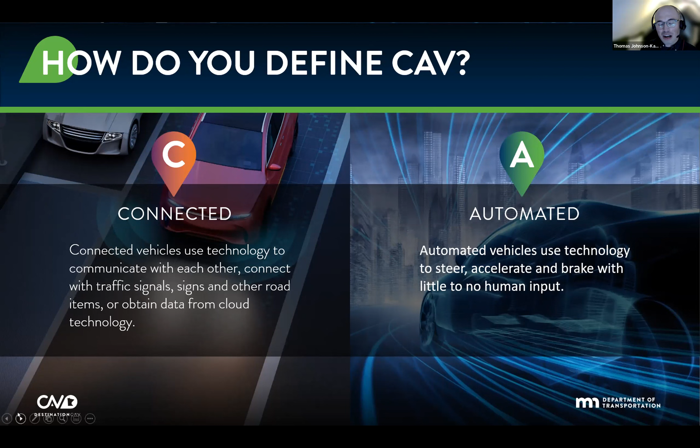So today I'm just going to highlight a few of our projects we have going on at MnDOT, just at a really high level. I'm happy to take questions, or if people want more information on these projects, feel free to reach out to me or anyone in our Connected Automated Vehicle Office at any time. We're always happy to chat and share what we're up to.

The first project I'll share about is one of our shuttle demonstration projects we have going on. This is called Bear Tracks. It's taking place in White Bear Lake, so just a suburb outside of the Twin Cities here. This is a 12-month pilot project testing technology in White Bear Lake. It started in the summer of 2022, so it'll wrap up this coming summer. It was funded through our CAV Challenge program, which is a competitive grant program that is kind of a rolling RFP for anyone to apply for funding to test out this technology.

This is actually one of 3 pilot projects we have or had in the state. Our first one was in downtown Rochester, the Med City Mover, that wrapped up last summer in 2022. Then we have this Bear Tracks project, which is taking place in a suburban environment. And then I'll also highlight our Go Marty project, which is taking place in a rural environment in Grand Rapids, Minnesota.

So a little bit about the shuttle in this project. The technology we're using is a highly automated shuttle provided by a company called Navya. It can hold up to 11 passengers, and it's a 100% electric vehicle.

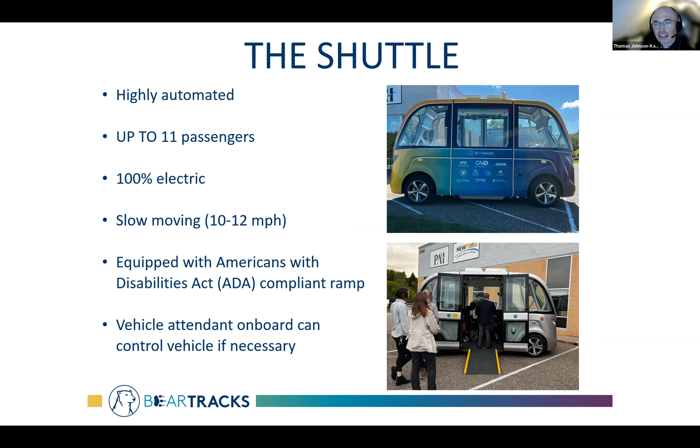This is a slow-moving shuttle, so it travels about 10 to 12 miles an hour. It is on the road with other vehicles. You'll see the route shortly. It's equipped with an ADA compliant ramp, and this shuttle, and all of our shuttle projects, have a vehicle attendant on board at all times to take over as necessary and assist passengers.

I'll just quickly go through these projects. Next I'll get into our Go Marty project. As I mentioned before, this is another autonomous shuttle project we have. This is taking place in Grand Rapids, Minnesota.

This one is an 18-month project. We launched in early October of 2022, so it'll run through March of 2024. Unlike the White Bear Lake project, which just has 1 shuttle, Go Marty has 5 vehicles that operate in about a 16.5 square mile area.

This is quite a different project where these shuttles are on demand and point to point. The shuttles can be requested through either a May Mobility app on a smartphone, or by calling into the local call center, First Call 211. There are about 70 pickup and drop off points within that 16.5 square mile area. When folks request a ride, it will tell you where the closest pickup or drop off point is, say where you want to go, and it'll drop you off at that closest point.

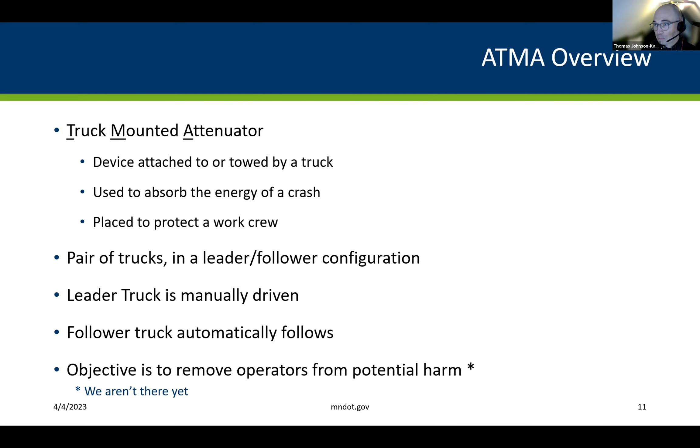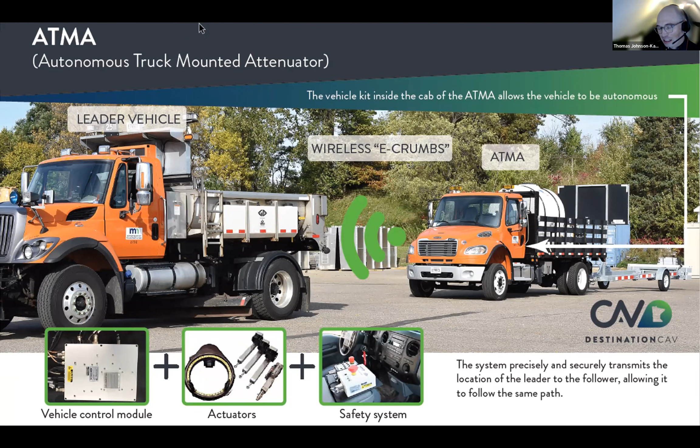So what we've done so far, this has been a multi-year effort. We've had these trucks, which are provided by Kratos, outfitted for the ATMA system. We've done some testing on a closed track at Elko Speedway. We had some folks from the Metro Lakeville shop at MnDOT perform this ATMA operation, attempting to integrate it into their existing work as some extra work. This was happening last summer.

We learned a lot. Some significant challenges occurred in the metro area - some system failures that required the truck to be out of position to restart. A few other challenges with dashboard warnings and visibility, and just limited hours of testing performed, with the cause being that extra work on top of what the already Lakeville shop staff was doing.

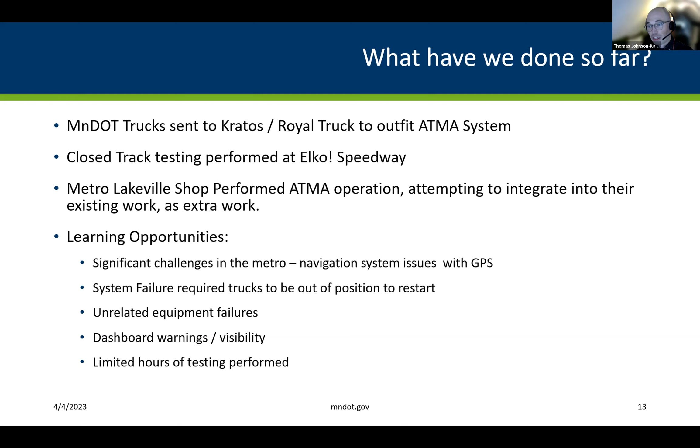So we're taking a little bit of a different approach this coming summer. We made a lot of improvements, software and hardware, to improve the system. And then our CAV-X group is hiring 2 temporary positions to operate the ATMA system throughout the entire summer. They're going to be testing it throughout all the MnDOT districts with district crews this summer, an opportunity to test this in different situations throughout the whole state, and for these crews throughout the district to see the ATMA system in person and interact with it.

The last project I'll highlight quickly is an exciting project we just got going in February called Community Driven CAV. The goal behind this project is that we envision a future where the community is at the forefront of planning and implementing new technology such as CAV. Traditionally, CAV technologies are often developed by companies or universities and then tested in communities - they develop a technology and look for a community or a problem that technology may solve.

So instead, we want to flip the script there, and we want the community to help identify what technology or uses of technology Minnesota plans for that could help address their issues.

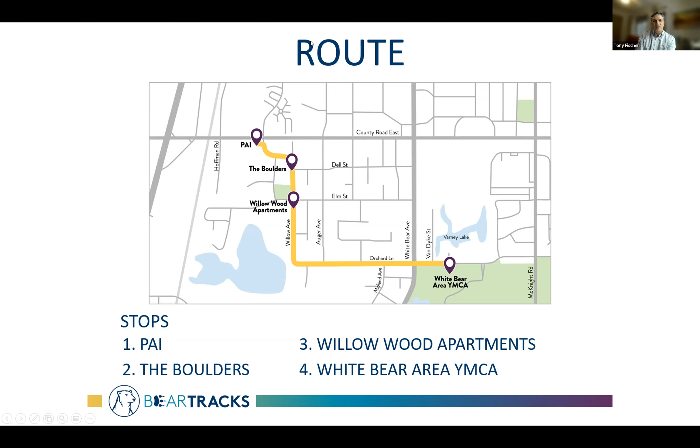Thank you, Tony. Can you see my screen? Looks good, okay.

I'm going to talk about special challenges for autonomous vehicles on winter roads. This is a quick outline of my talk. I'll give you an initial overview of autonomous vehicles in general and the MnCAV vehicle in particular, and tell you a little bit about some of our work on the MnCAV vehicle. Then I'll talk about the challenges for winter operation and some potential solutions to these challenges.

So the two core elements of autonomy are basically adaptive cruise control and steering control. In the case of adaptive cruise control, as you probably know, it's an extension of cruise control where the car has a radar and it's able to measure distances to other cars. The system operates at a desired speed set by the driver, and the throttle and brakes are automatically controlled. But if there is a slower moving car in the same lane, the car switches from speed control to spacing control, and maintains a distance behind the car it is following. Typically this distance is a time gap, for example 1 second or 2 seconds.

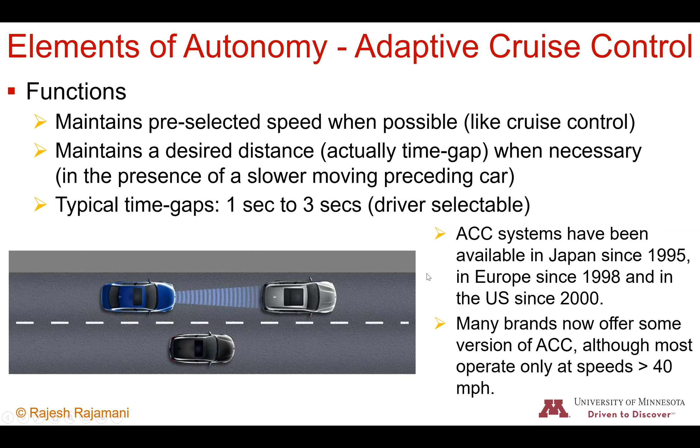Okay, can you still hear me? You cut out for a moment. Are you able to hear me? Yeah, a little bit, I don't know how good the sound quality is, hang on one second. That sounded much better. Sorry about that, that's sounding much better now.

Okay, so the other element of autonomy is basically automatic steering. In the case of automatic steering, cars sold on the road use cameras to measure distances to the lane boundaries, measuring the lateral distance to find your distance from the center of the lane, and this distance is used as feedback control for automatically controlling steering. The types of systems available on cars in the market are warning systems that warn you if your car is going to leave the lane, and automatic lane keeping systems that entirely automate steering control, taking care of steering and enabling staying in the lane, following the lane.

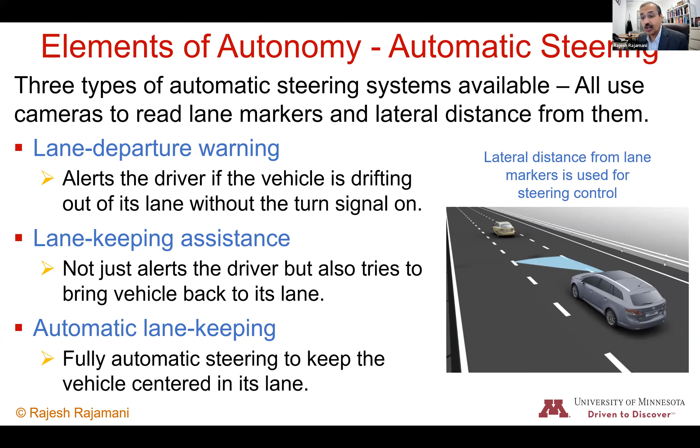So these two elements, adaptive cruise control and automatic steering, are the two basic elements of autonomy, and these are available on level 2 cars sold in the market. In the case of level 2 cars, the driver is responsible for the safety of the car. Oftentimes you need to have your hands on the steering wheel, and you are responsible for finding out if the system is operating safely, and you have to take over if the system is not able to operate by itself.

So what do we have beyond ACC and automatic steering? Here are some systems that are available in the market.

So we have the Cadillac Super Cruise system. This is a system that is available on a few mapped highways. For example, in the Twin Cities, it includes 35E, 35W, and 494.

What the system has, in addition to adaptive cruise control and lane centering, is a few other features. It doesn't require the driver to have hands on the wheel. You still cannot turn back and speak to somebody in the back seat or do things like that. There is a camera that is monitoring you and ensuring that you're looking at the road, but otherwise it doesn't require you to have your hands on the steering.

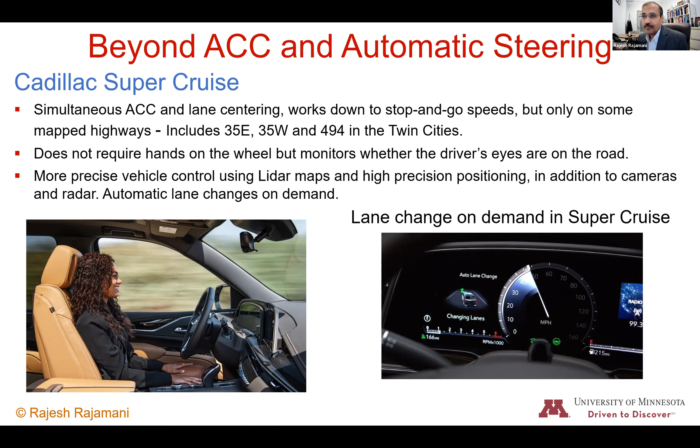So another system that goes beyond level 2 is the Tesla Autopilot. The standard Tesla Autopilot is available on all Teslas, and that is essentially an ACC plus automatic steering system that works in stop and go traffic.

But you can pay an extra $10,000 and get a beta option on a full self-driving system. What this full self-driving system does is it contains more autonomous driving features like automatic lane changes, navigate on autopilot.

It will basically make automatic lane changes. You don't have to request the lane change, it will make those lane changes by itself. It will also take exits when needed, change between highways, for example. It also recognizes traffic lights and stop signs, so it can operate on local roads in addition to highways. So it's got quite a few features beyond the basic autopilot that's available on all the Teslas.

But on this system as well, the driver is required to have hands on the steering wheel and be prepared to take over at any time.

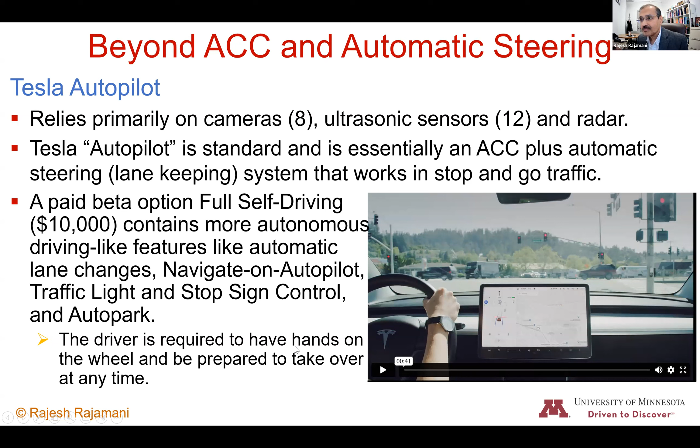So then the MnCAV vehicle that we have at the University of Minnesota. This is a level 2 system. The Center for Transportation Studies owns this vehicle, and so they raised the money for it.

What it is, is a Chrysler Pacifica minivan. This was instrumented by a company called DataSpeed. They implemented the by-wire interfaces on this vehicle and the firmware and software.

Are you still able to hear me? You cut out just for a moment. Is it okay now? Yes, okay.

So the MnCAV vehicle essentially has steering control, and this is a level 2 system for operation on freeways. It has automatic steering control. It uses a Mobileye camera, which is a commercially available system, using lane markings to find the distance from the center of the lane and to do steering control.

It also does lane changes on demand, so you can ask for a lane change. It uses LiDAR segmentation to decide if it is safe to do a lane change, and then does the lane change when it is safe to do so.

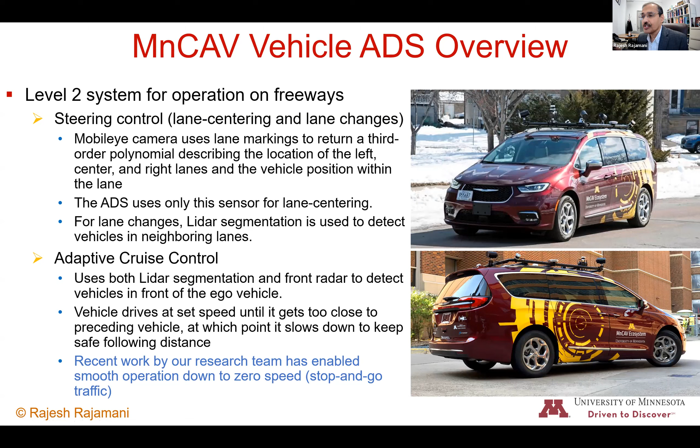So some of the recent research work that we did, I'm going to talk about that on the next slide. We are doing some work on improving the performance of the automation on the MnCAV vehicle.

As far as the adaptive cruise control system, one of the problems with the ACC system that came with the MnCAV vehicle was it did not operate when the speeds drop. Also, it had jerky operation, especially when you use larger time gaps, and when other vehicles cut in, the operation was quite jerky.

So what we did is we implemented smoother ACC operation that included transitional maneuvers. With the transitional maneuvers, we are able to smoothly switch between speed control and spacing control. If the lead car makes a lane change and goes away, or if some other car cuts in, those operations have become really smooth, and you don't notice any hard braking. So those things work out very nicely now.

We also have stop and go operation under heavy traffic, so that works nicely now. Some of the challenges that we had for stop and go operation was that the radar system was designed to discard stationary objects.

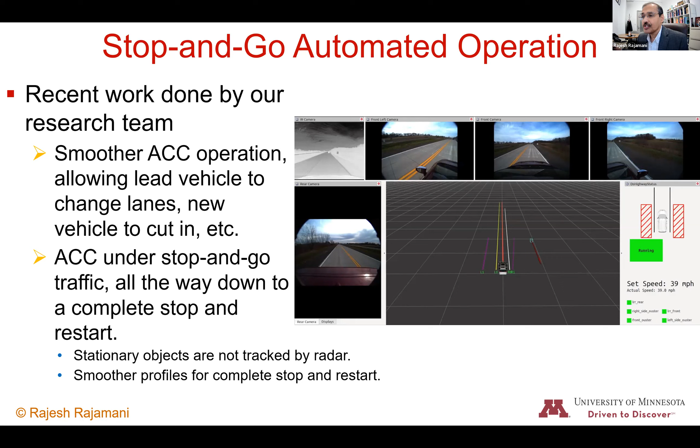What I'm going to show you now is a quick video of the MnCAV vehicle under heavy traffic. What you can see in this video is both automatic steering control and ACC. You can see the set speed set by the user and the actual speed. The actual speed is lower because of the traffic on the highway, so the car is supposed to go.

I think we lost Raj for a moment. Hopefully just for a moment. See if we can get him back. I'm guessing the video may have stretched his bandwidth too much, so it might have kicked him out.

Yeah, I wonder, Gina, do we want to jump into Raphael's presentation right away? I don't know how long it's going to take to get Raj back. I'm ready to go now if you want me to, and then we can let Raj finish his talk once I'm done. I don't want to interrupt Raj like that, but if he's not here right now, yeah, why don't we go ahead? Okay, apologies to Raj.

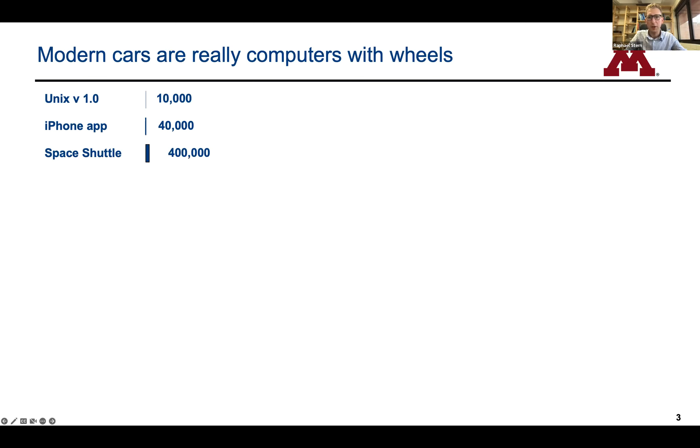So if you think about how much text is there to make that software run, about 10,000 lines of code. If you look at an iPhone app, it's about 40,000 lines of code. Lines of code is roughly a proxy for complexity, and how much this thing depends on computation. The space shuttle had about 400,000 lines of code, a 10-fold increase from an iPhone app, which is kind of impressive that they flew things into space and back with really just fewer apps than I have on my home screen in terms of computational ability.

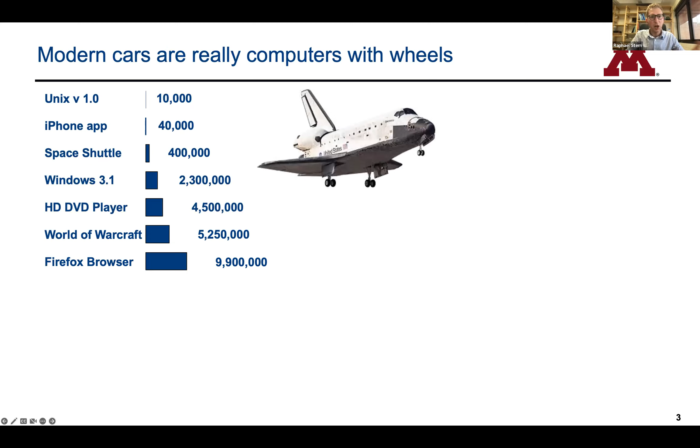Windows 3.1, the original Windows, about 2 million lines of code. HD DVD player, perhaps somewhat dated, but about 4.5 million lines of code. World of Warcraft, all of it, is only about 5 million lines of code. A browser is about 10 million. And I think it's kind of surprising what types of things here are much more complex than other things that we take for granted.

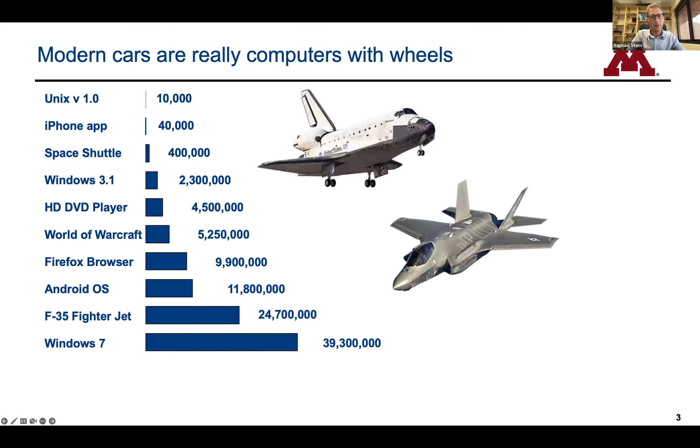So the entire F-35 fighter jet is about 25 million lines of code. Windows 7 is about 40 million lines of code. Facebook about 60. And a modern car, not an autonomous or connected and autonomous vehicle, but just a modern car alone has about 100,000... excuse me, about 100 million lines of code. So before we think about automation, connectivity, all of that, just the cars on the road today are already basically cars with computers with wheels, right? They're already so much more complex, computationally speaking, than anything we've seen before.

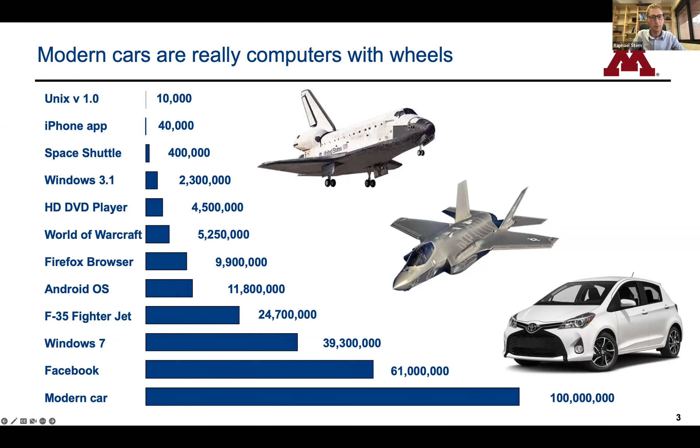And this obviously brings us to a lot of different opportunities for malicious actors to compromise this. I want to focus on 3 primary types of attacks that I focused on in my Future of Mobility piece that I think are particularly relevant when we talk about CAVs and cyber attacks. So the 3 types of attacks that I want us to be thinking about today are infrastructure-based attacks, communication-based attacks, and sensor-based attacks. We'll go through some examples of these in just a few minutes, and then talk about what they potentially could look like when it comes to transportation management and what the impacts might be for transportation. So infrastructure-based attacks, this is basically you compromise some sort of physical infrastructure at the roadway level.

So this might be, for example, you tamper with some sort of roadside units. One thing that's become quite popular is this idea of signal phasing and timing being shared from the traffic signals to the vehicles to allow the vehicles to adjust their driving and operate more efficiently. And you can imagine that if you somehow compromise that roadside unit, you could be sending improper signal phasing and timing to the vehicle. In the best case, this might just mean suboptimal performance. The vehicle doesn't actually know the true signal phasing and timing and performs suboptimally, maybe increases fuel consumption. But in the worst case, it could increase crashes, right? You could cause crashes by conveying the wrong SPAT messages.

Communication-based attacks might look similar because in theory this is communicated information that's being tampered with. But with communication-based attacks, the idea is that you're actually tampering with the communications, in what's often called a man-in-the-middle attack. Some malicious actor is taking in that information and actually broadcasting a slightly different signal that makes this CAV think that the CAV in front of it is telling it something different. And this could again be catastrophic. These could be basic safety messages that you're tampering with, or this could be just a minor inconvenience. This could be some sort of message about the intentions of what the CAV wants to do that this following CAV then misinterprets.

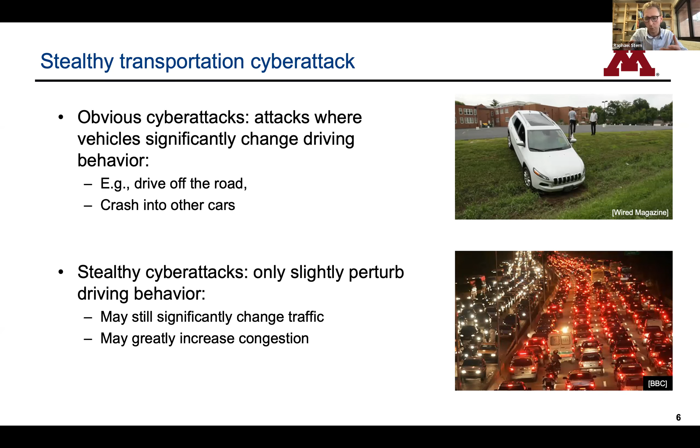I want to motivate this with some work I've been thinking about for a long time, which is understanding how traffic jams form and what causes them. If you've seen me talk before, you might have seen me talk about these, because I think they're really important. These are traffic jams. It turns out we see them in the wild, we can reproduce them in the lab. The way cars drive causes traffic jams.

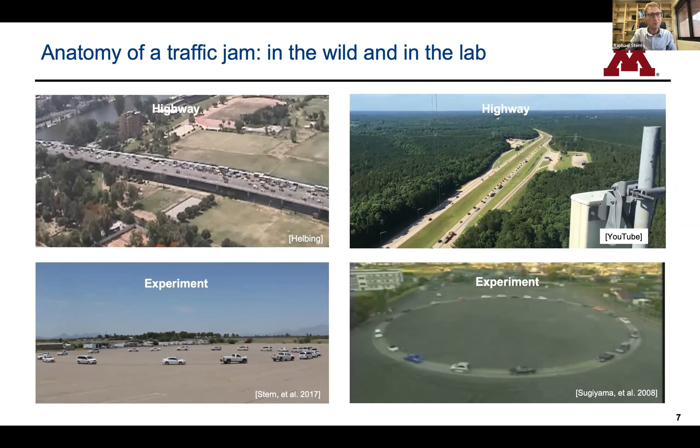For a long time there's been a lot of promise that automated vehicles, by driving differently, even if we don't have all of the vehicles automated, even just a small number of automated vehicles potentially have the opportunity to change the way this happens and change that traffic flow. I've done a lot of work on this. It turns out that with just one vehicle out of 20, or so, like 5% of vehicles driving a little bit differently, you start to see substantial difference.

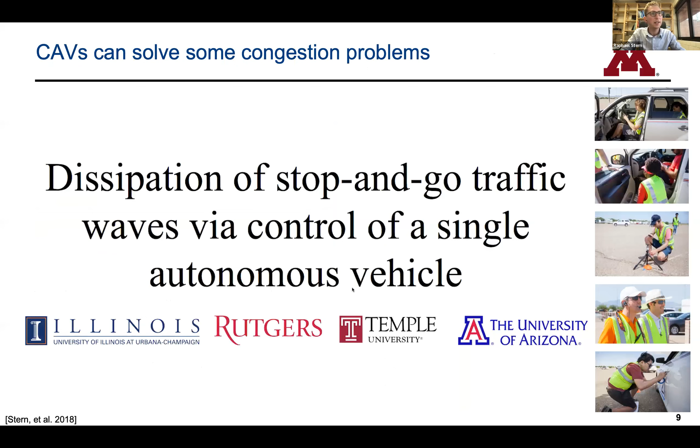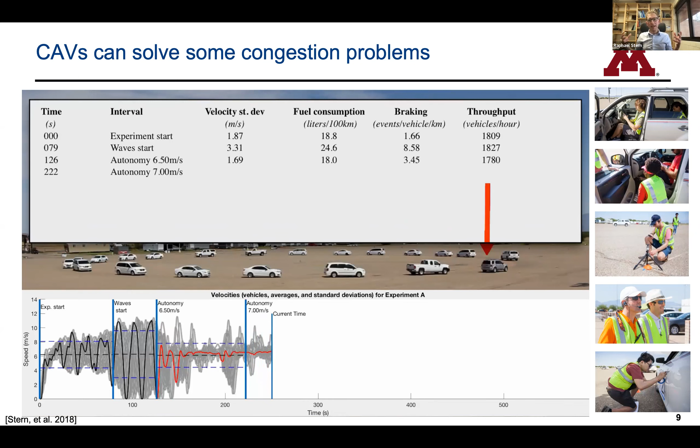And that's kind of inevitable. But what you can do, if you turn on the automated vehicle's self-driving capabilities and control it just right, that's what we see with the red arrow, is smooth out that traffic. The big take-home message here that I really want people to see is, yes, automated vehicles have the potential to change traffic and improve it, and the way they potentially will do that is by changing the emergent properties of that flow. Even if we only have a small number of automated vehicles driving differently, they can make huge improvements. In this case, we saw an increase in throughput and a decrease in fuel consumption of all vehicles.

But I want you to think about that in the other way. Imagine that a vehicle was just driving a little bit better, and that greatly improved traffic flow. What if that vehicle were driving a little bit worse? Many of you have probably experienced this. Oftentimes it just takes one bad driver on the road who's swerving a lot, or possibly changing lanes a lot, or just not driving consistently, to deteriorate the entire flow.

So you can imagine that if you compromise just a couple of vehicles in that flow and get them to drive just a little bit worse, not a lot worse, just a little bit worse, that potentially, under the right circumstances, could be really detrimental to the flow. And these big improvements in fuel consumption that we see from autonomous vehicles improving flow could lead to big increases in fuel consumption if the autonomous vehicles are compromised and actively deteriorating the flow.

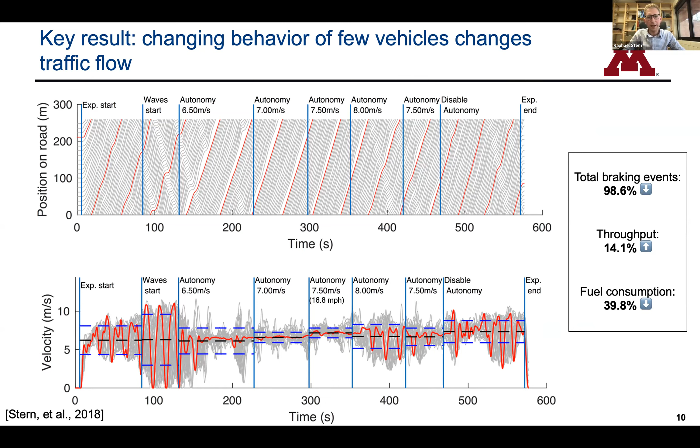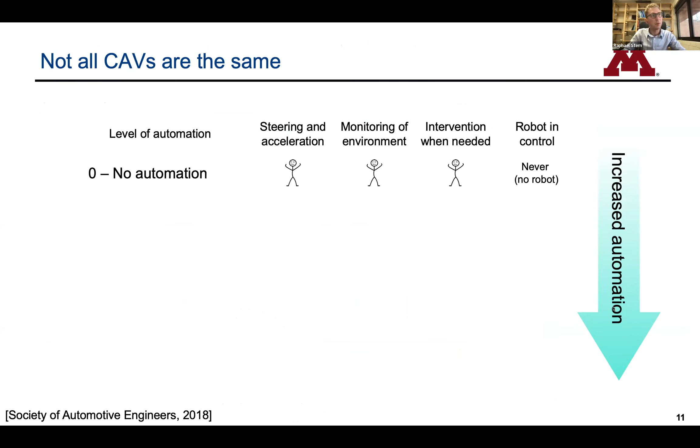I want to point out, to Raj's point earlier, there's a spectrum of autonomy, right? If you think about no automation, that's what most people think of as cars, but really there are a lot of different levels of autonomy. In each of these levels, we're basically taking more of that control and handing it over from the human driver to the vehicle. So what Thomas was showing earlier was level 4 automation on the roads, but I'd argue a lot of this could also be possible at levels 1, 2, and 3. So if you start to think about vehicles being compromised, driving just a little bit worse and deteriorating the flow, that could actually start happening even sooner if we're not careful.

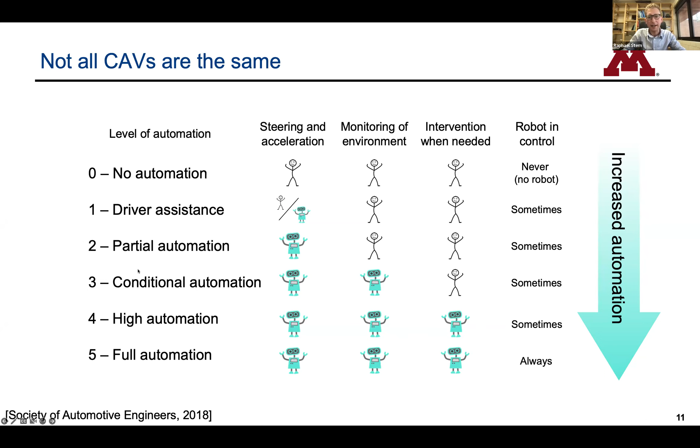How can we detect this? Because the whole point of these stealthy attacks is that they're difficult to detect. If you're the individual driver in a vehicle, you're not going to notice that your vehicle's driving any different because it's not crashing into other cars. But you might see an increase in fuel consumption, or a decrease in throughput if you're an infrastructure manager, or a long-term average increase in crashes.

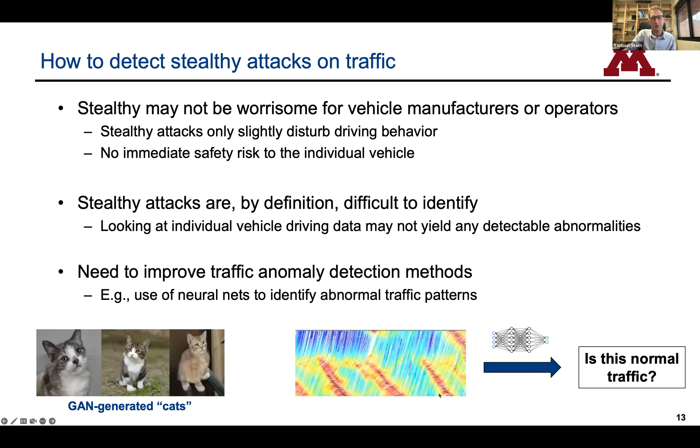Now, pinpointing the actual vehicle is another challenge. Okay, I'm almost out of time here, so let me summarize with a couple of key takeaway points.

Vehicle automation takes many forms, but in all the forms, CAVs just have more computation. And whenever you have more computation going on, more code, that's more opportunities for compromise. The important thing is, when we think about this from the infrastructure management or traffic flow management perspective, changing the behavior of just a small number of agents changes the flow.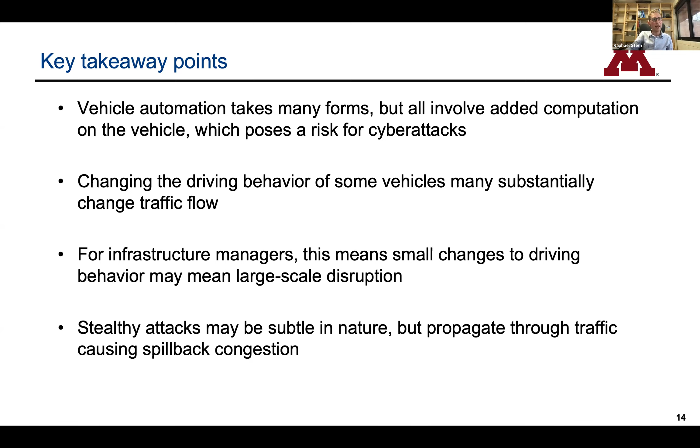So if somebody is maliciously changing the behavior of a couple of vehicles, just by maybe a software update that makes a couple of CAVs drive a little worse, you could potentially have these stealthy cyber attacks that you can't actually detect by looking at individual vehicles, but that have really, really bad spillback effects on congestion.

Okay, so what are the action items that we identified in the future of mobility piece? We need to recognize this, and we need to recognize that CAVs are important technology that have the potential to really improve things, but they also have the potential for compromise.

I think the first step is to recognize this. The second step is to make sure there are robust security measures placed on vehicles, and manufacturers are already working towards this.

This is going to be a continuous game of cat and mouse as hackers find new ways to compromise these vehicles, and manufacturers will have to find new ways to safeguard against these attacks. I think there's also a role for research here—specifically research to identify at the traffic level how we detect when something is compromised, and how we pinpoint this. Then what's the playbook for a regional transportation management center to know that it's operating with some number of compromised vehicles in its traffic stream?

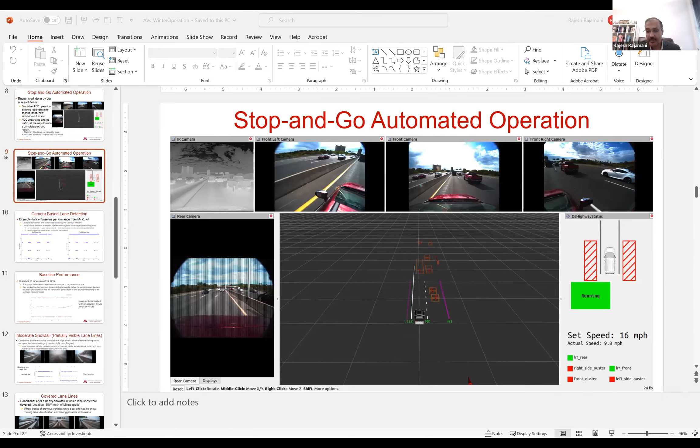Okay, I think I was on this slide when I cut out, but I was going to try to show you this video of the MnCAV vehicle with some of the modified software we've implemented on it to enable it to work under stop and go traffic, under heavy traffic. So let me play this video here.

So the set speed is the speed at which we want the car to go. The actual speed is lower because of significant traffic—it's forced to follow other vehicles, so it's not able to go at the desired speed. You can see here all the other cars on the road, and as the traffic gets heavier, the speed drops on the car, and it can come to a complete stop, essentially.

So this is the system operating with both automatic steering control and adaptive cruise control, and basically it can do stop and go operation. This is one of the things we implemented on the MnCAV vehicle. One other aspect we're working on right now is to fix some problems with the steering controller, especially offset errors while going on sharp curves—we're trying to fix that to make it follow curved roads better.

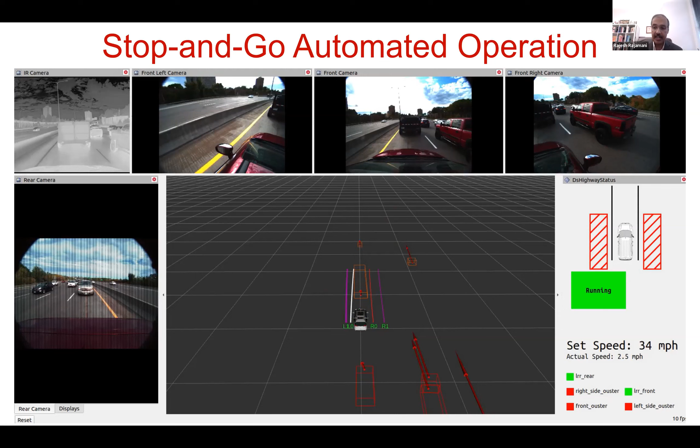So let me move on to winter operation problems. As I told you before, we use a Mobileye commercial system that measures distances to lane markers. What the Mobileye software does is give you the lateral distance to the lane markers, but it also gives you quality of line detection. The quality of line detection could be anywhere from 0 to 3, where 0 is very bad and 3 is very good line detection, with 2 being moderate line detection.

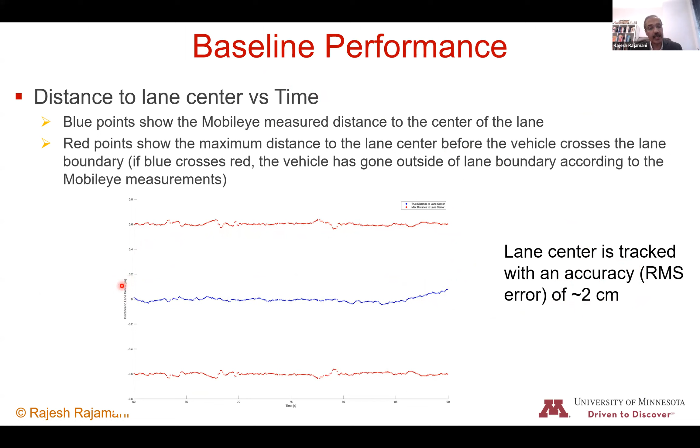Under good road conditions, the quality of line detection is typically 3, as you can see in these plots here, the left lane line and the right lane line—the quality is 3 most of the time. If the quality is 3 or 2, it's possible to engage the automatic steering control system, and when engaged you get pretty good tracking of the lane center. Our accuracy in tracking the lane center is on the order of 2 centimeters, so baseline performance is pretty good—probably more accurate than what a human driver typically does.

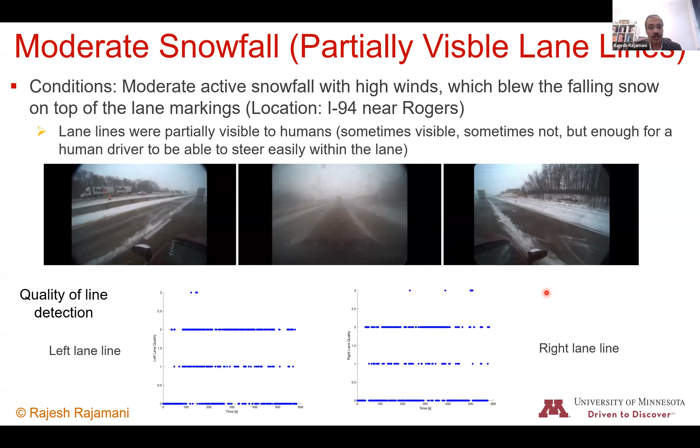This slide considers a situation where there is moderate active snowfall going on—so there is active snowfall, but the lane lines are still at least partially visible. You can see here the left lane lines are visible, and the right lane lines are also partially visible. If you look at the quality of line detection returned by Mobileye, it's 2 for quite a bit of the time. Here, we were able to engage the steering control system, but every once in a while it would drop out, so it wasn't fun to drive because the system kept getting disengaged. This was the problem when the lane lines were quite visible and a human driver could still drive quite well, but the automatic system really could not be engaged much.

The automatic steering could not be engaged. Even though snowfall had stopped, the lane boundaries were covered for a long time. And this is really a problem because here the human driver can actually drive quite well. The human driver can see where the lane is and can drive without a problem, but the automatic system cannot drive.

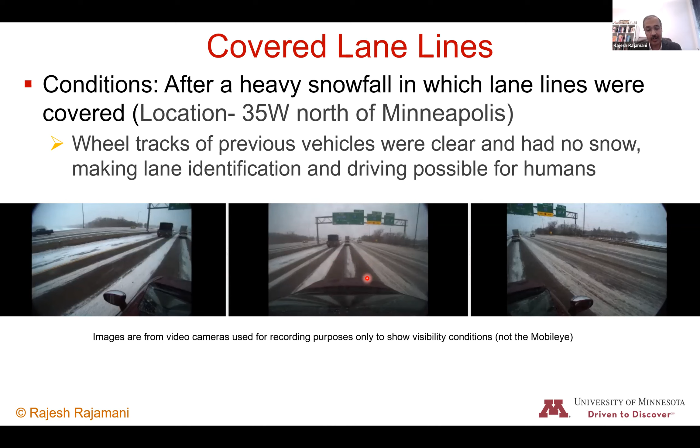So if lane lines are not visible, what other methods can you use to do steering control? One possibility is to use high precision GPS. With GPS, if you can find the absolute position of the car, and if you have a digital map which tells you where the lane lines are in absolute coordinates, then you can use that for doing steering control. You can also have LiDAR maps. LiDAR maps are basically where you use LiDAR to detect objects in the surrounding, like buildings, fences, trees, and so on. And that helps you localize yourself, find your position, and do steering control.

The other possibility is to do what humans do, in the sense that humans are able to drive even when the lane lines are not visible. And so if there is a control system or an advanced AI system that is able to drive even when the lane lines are not visible, that would be a good solution.

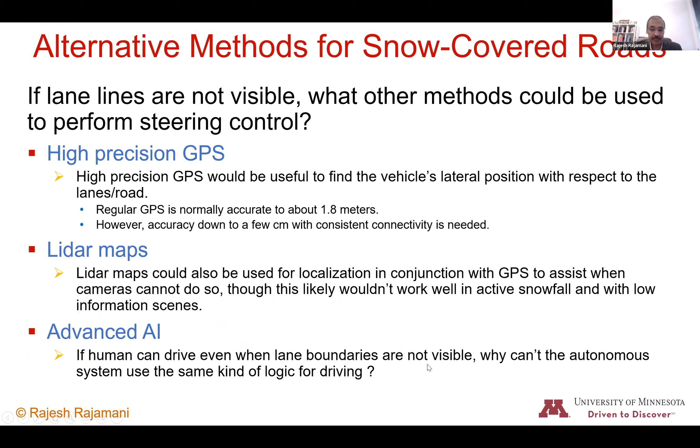So I'll just talk a little bit about the GPS solution, and I know I'm running out of time here, and then go on to my conclusion slide. As far as GNSS or GPS, by itself GPS only gives you an accuracy that is of the order of 2 meters or so. So by itself, it is just not accurate enough. The position readings from it are not accurate enough to do steering control, because you need centimeter level position accuracy.

But if you use RTK corrections, so if you use GPS signals and also corrections from a network of base stations with accurately known locations, then it is possible to get much more accurate positions. And so that might enable automatic steering control. We have the MnCORS network, for example, and the current purpose of these stationary base stations is for land surveying.

Some challenges with using this type of network for corrections is that you get a lot of obstructions in urban and suburban roads. And so you can lose the correction signals quite a bit of the time. And if you lose the correction signals, then you again have very poor position accuracy in that case. Not only that, when you lose the correction signal, it can take you a long time to reacquire the signal. And so that can really compromise automated driving.

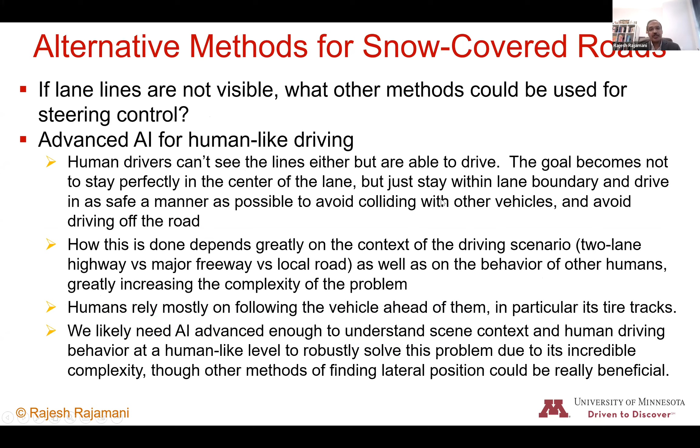So with that, let me just move on to my conclusion slide. Our conclusion is basically that camera-based lane line detection systems, which are the most common systems used for steering, especially on cars sold to the general public, won't work when the road is covered with snow.

So alternative sensing, alternative signal processing techniques are required when snow is covering the road surface. As far as the industry is concerned, companies like Tesla, Google, Uber, and so on, they are focused on developing level 4 systems for driving in good conditions rather than L2 systems for driving in poor conditions like winter conditions. So we may not see significant improvement for many years to come unless we, meaning states like Minnesota, take the initiative.

These big companies are really not looking at driving in poor conditions. If the winter driving problem could be made less complex through smart infrastructure, so if, for example, the MnCORS network is improved, that could accelerate the development of more robust systems for winter driving.

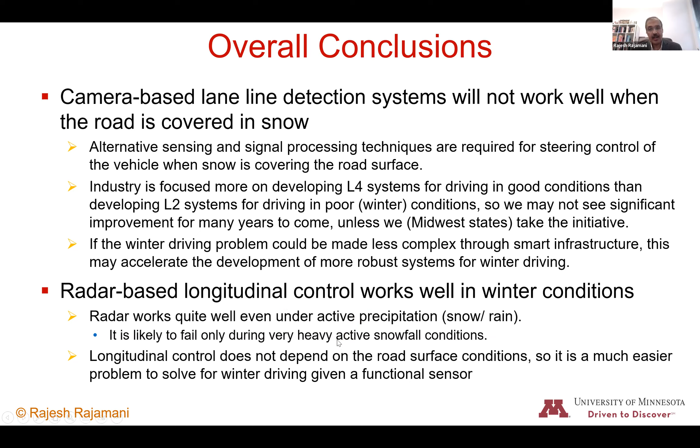I'll stop with that. I hope you were all able to hear me and that I was connected the whole time. I just kept talking, I hope I was actually connected. Yeah, I think that worked out.

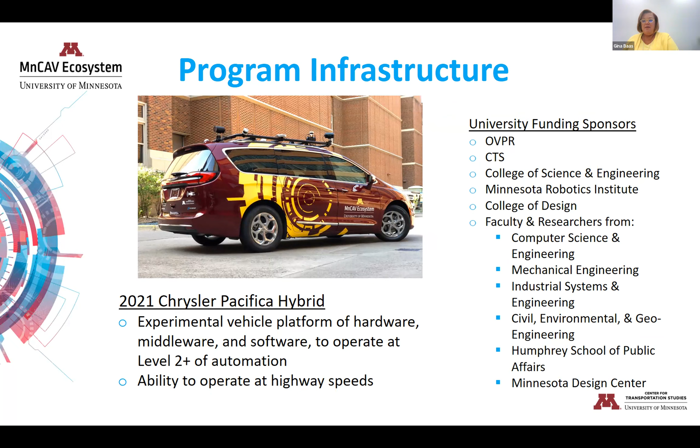Some of the advantages, as Raj has talked about a little, is that it's a customizable platform that allows researchers to experiment on whatever they might be interested in, and we also see it as a vessel or vehicle for data collection and analysis for projects as well.

Our 5 major research focus areas, although we're obviously engaged in other areas as well, are equity and public perception and trust, vulnerable road users, cold weather conditions, and the connected environment. And I would say one thing CTS does well as an interdisciplinary center is bring together the 2 sides of the coin.

So both the policy and planning aspects of topics, as well as bringing them together with the technology and human factors. That is something we are uniquely positioned at the university to do.

Right now we've got probably about a dozen active CAV-related projects, including the 2 that Raj and Raphael spoke about. And we also have 3 research projects that are associated with the 3 shuttle pilots that Thomas spoke about earlier.